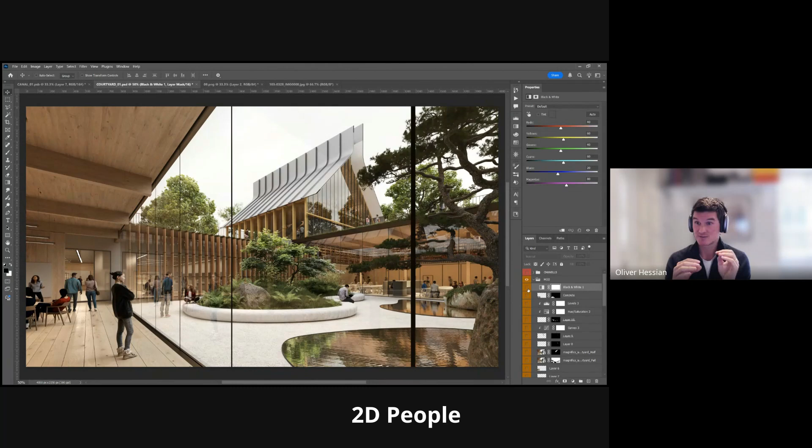The first thing you think about is the people that you're choosing. Makes a huge difference to how easy it is to get them to sit into the scene. That might sound obvious, but it's amazing how often that is not done, even at super professional level.

It's really basic things like, what is the atmosphere that you've painted? Where is the sun coming from? Is it a bright day, a winter day, a summer's day? What is the atmosphere you've created? Do the people you're selecting marry up with that atmosphere, time of day, place? Because there's nothing worse than people playing in the park, and there's a guy in an anorak with a beanie on who looks like he's just walked out of Russia. They stand out immediately like a sore thumb. So clothing should really be a qualifier when you're choosing people for a scene.

The sun direction, light direction is a big one, because that's really difficult to change. When you drop people in a scene and the shadow's coming from the wrong side, it can be difficult to know what's wrong, but that's what's wrong. So being conscious of that if you're flipping people—where is the shadow on them, where is the sun on them, and how do they sit in your scene—is really important to be conscious of.

Color is actually a really good thing to keep an eye on, because as you're working towards creating an image, there's a harmony in the colors you're putting together, and you'll have resolved that to get to the point where you're happy with the image. Dropping in people with bright colors that jar with the image can really upset the way they sit in it. That's something that can be adjusted in Photoshop, but you need to be aware you have to do it if you're going to drop that person in, because they might be the perfect person, but wearing a bright pink t-shirt—so you just need to reduce the pink in their t-shirt. I'll try to run through quickly how I'd go about doing that in a sec.

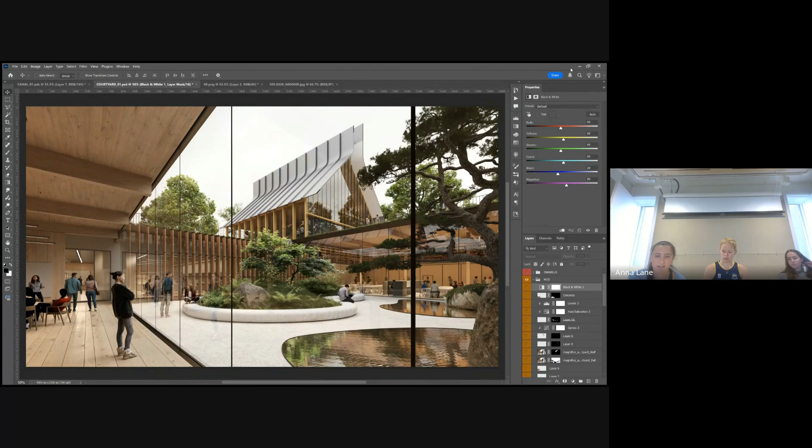What other camera settings for exterior perspectives, like depth of field and focal length, do you normally use? Your options are normally parallel perspective, or sometimes that's called orthogonal, where everything's straight. It's great for diagrams, but you basically never use that for perspectives because it's not perspective. Then you've got 2-point perspective, and the other one is 3-point perspective. To be honest, either of those are fine.

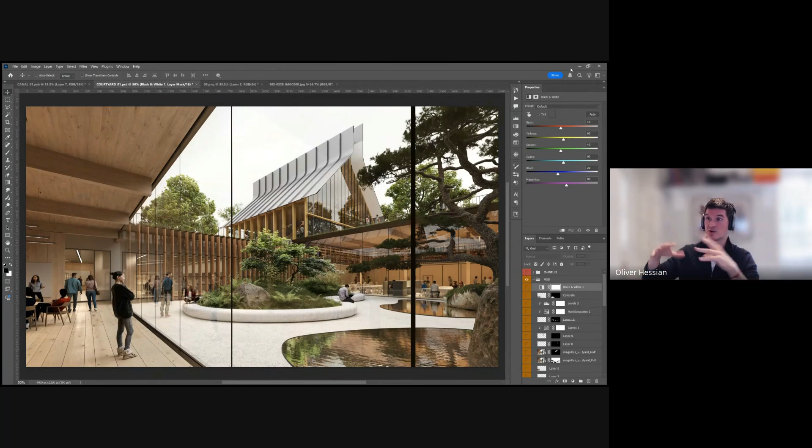The thing you probably want to be conscious of is being able to set your field of view, and try to treat it like you've got a normal camera rather than a fisheye lens, because there's a temptation to try to capture as much as possible in one view. What happens is you really stretch the stuff on the edges and it looks weird. Also, if you're doing that, you're probably better off framing a specific message and then another specific message rather than one image trying to capture everything, because then you lose what the focus is, what story you're trying to tell, because you're trying to tell too many stories.

So rule of thumb, and this depends on your settings and how you control it, but let me just check. I try to never go beyond like a 20mm lens. A 20mm lens, that's focal length, is the equivalent of like an 83 to 84 degree field of view. So you're seeing kind of almost 90 degrees.

I think when you go lower than that in camera millimeters, it gets wider, and it starts to get a bit stretched out. If you go up to like 50, you're getting quite narrow, and those longer lenses are really powerful if you're trying to capture a moment, though you probably won't need to deal with that so much. I'd say if you try to keep whatever you're framing within an 80 degree field of view, you're in about the right territory.

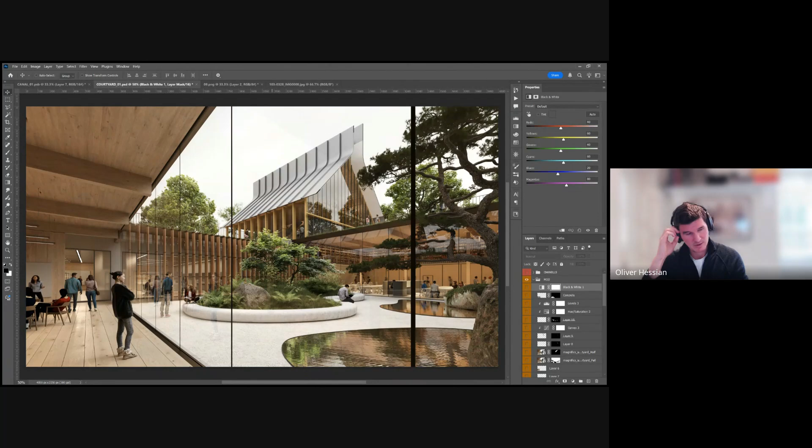With regards to the people, all the things I've gone through earlier apply specifically. They're all really relevant. Let me just drag a cutout person in here, and I'll try to show you what I mean.

Sorry, I have to go now, but I just want to say thank you. No problem, good luck with the deadline. Thank you, yeah, bye, bye.

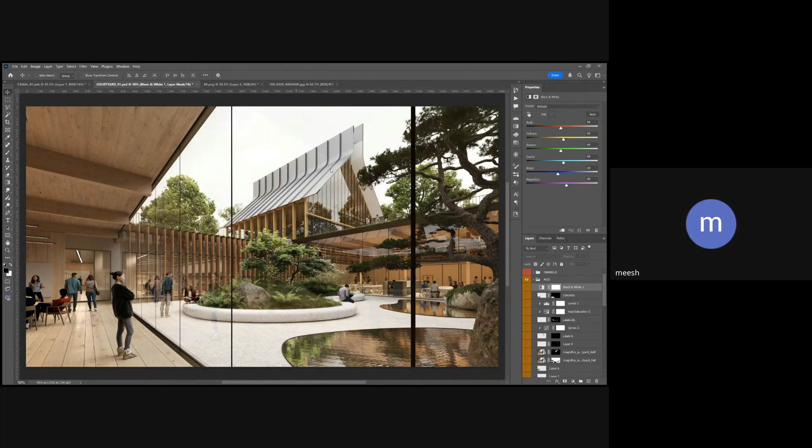Try and choose the right person now. Let's try these two.

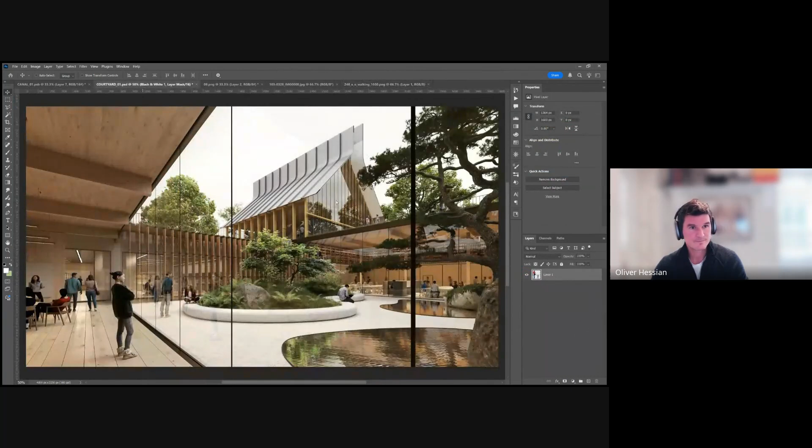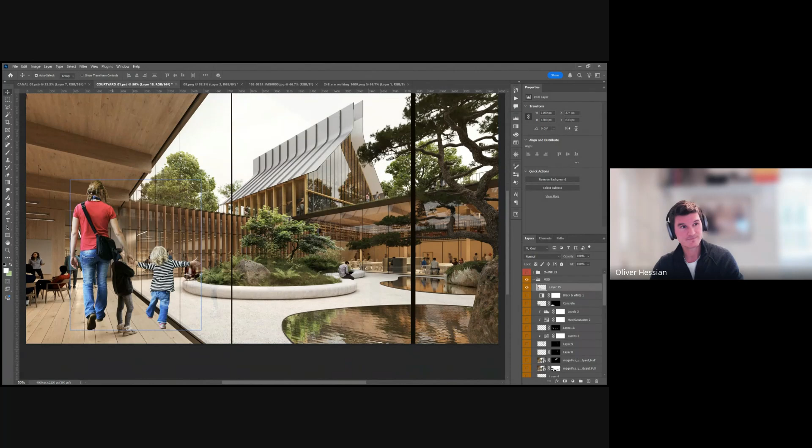Starting point, she's got a bright red t-shirt on, it's not ideal. Also, I'd probably say the light is coming from the left, so try and flip those so it looks like she's maybe walking alongside the edge of the glass.

When I do this, I'll quite often pull a ruler down. If I've got any 3D people, it's obviously helpful because I can see, alright, roughly that's eye level, which means I need them to be just back here, about there. That's probably about right. This is where I'd probably start applying curves and clipping it down to them, and probably reducing the intensity of the brightness.

Maybe softening the blacks, I can add a mask to their layer where I need to cut her out. In the Magic Wand, you have this setting for contiguous, which means if that's on, I'll only select that part of the red, whereas if I turn it off, any red will get selected across the scene, which is quite handy. So if I grab her, go to my mask and say, yeah, I want that bit to be black.

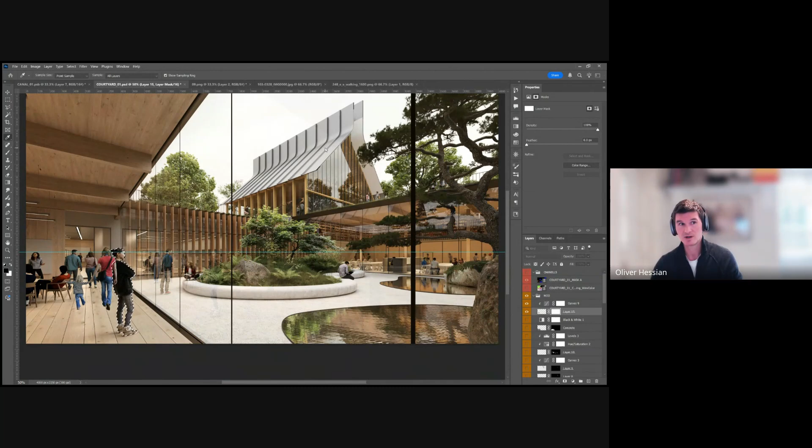That's another shortcut as well. Shift backspace just pulls up the fill command, and then you can choose. I nearly always have this just left on foreground color, and then I can toggle with the X to make that black. So then she's kind of chopped out.

This is kind of an interesting one because the light is so diffuse that sometimes what I would do is copy a version of them, and then distort this. So that's Control T to transform, and then I basically stretch them around until I had the shadows where I felt like they needed to be. Which when you've got two people is more difficult because they probably need to be edited separately.

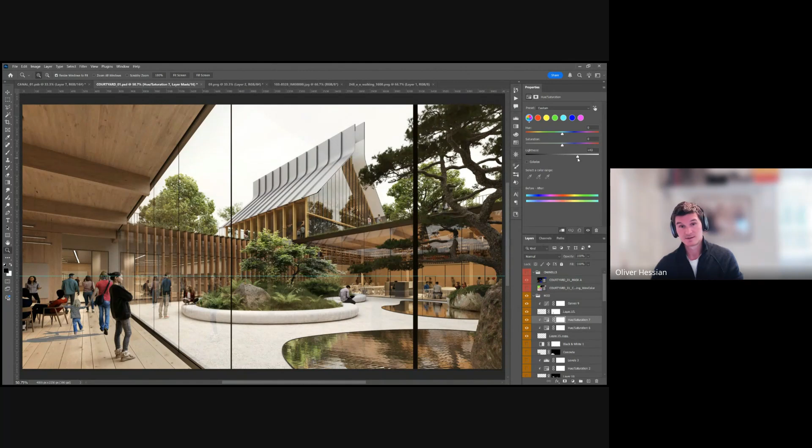But let's just say the sun was doing that, so I kind of get them roughly where I needed them to be. This is actually the only time I do this, but I'll do it anyway. I'd normally just apply this directly to that layer, but if I just reduce the saturation, and then actually what I do is I quite often go all the way to black, so just darkness, lightness goes all the way down to the bottom, and then I'll add another one that just lifts that a little bit, so there's like a gray.

And then I'll use the blur, Gaussian blur, just to soften that. Depending on how precise you want to be, sometimes I'll do two of these, one for closer to their feet and one for further away, and then I'll blend between the two. Essentially what you're trying to do is just soften the shadow, which is normally more realistic.

And then the shadow I would put on a multiply layer so that you're allowing the stuff from below to impact it. And then depending on what I'm trying to achieve.

Oh, I still got my leaf. Okay, just back to soft round.

I'd use another mask to maybe make it stronger at the bottom and soften it. So that's how I do it if it was sunnier outside and I needed a full shadow. In this case, because it's not, I'd probably just paint something in and put that underneath them. So it's quite helpful actually.

When I used to do this a lot more, I'd always group the people. So in here, I probably just, because it's just see down here. And you can be quite rough initially with it, because then you can just go back.

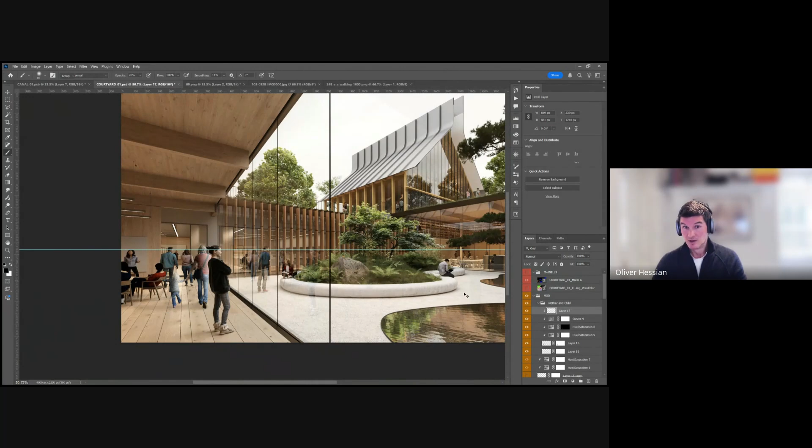The last thing that I do on this sometimes is just create a new layer, a blank layer, and with black and white on quite a soft opacity, I'll brush in where I think the light's coming from, but I'll also do the equivalent on the shaded side. So something roughly like that, which then if you put onto a soft light, it sits into the character and gives them a slightly more directional light.

And depending on how strong you want that to be, you can just fade that again.